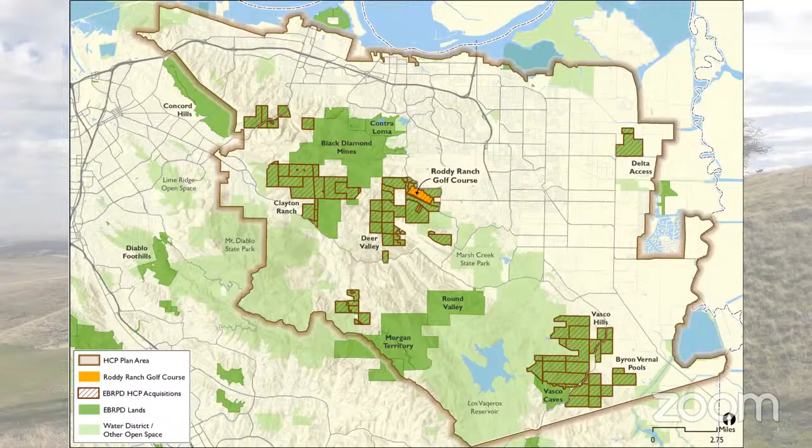A little bit about the Habitat Conservancy: it's a multi-agency partnership between Contra Costa County and cities of Eastern Contra Costa County. It may include up to 30,000 acres of protected lands in East County.

Recreation allowed on these lands is passive recreation only, so that could include things like hiking, mountain bikes, dogs on leash where allowed. We can have up to 4 staging areas, essentially areas where you can park more than 15 vehicles, and we're limited to recreational disturbances of a total of 50 acres, which includes trails, staging areas, and any sort of recreational improvements. The primary goal of the habitat conservation lands, as its name suggests, is habitat protection and restoration.

A little bit of site history: the land which we're calling the future Deer Valley Regional Preserve, of which Roddy Ranch Golf Course is a part, was purchased by Jack Roddy in the 1970s. He was a former rodeo star in the 50s and 60s, settled in the Antioch area, and grazed cattle on the land for many years. In the early 2000s, he saw an opportunity to build a golf course, and there was a golf club up in the hills near his home, which operated from 2000 to 2016.

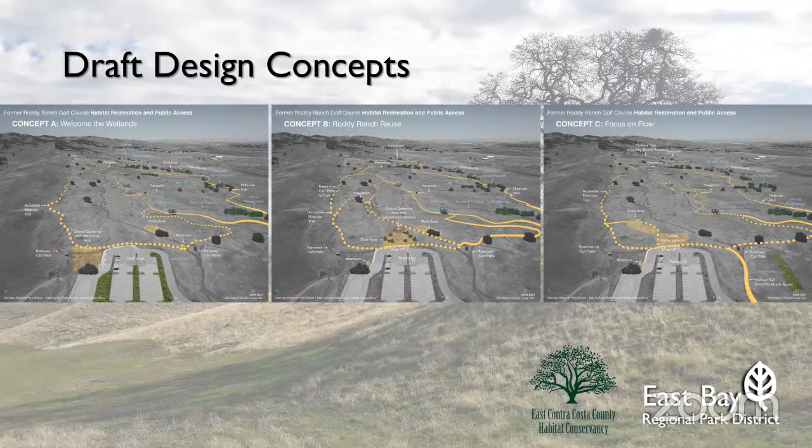I've got on the screen an aerial or perspective view of the 3 design concepts, with the yellow dashed and solid lines indicating accessible trails and multi-use trails, respectively. These were ideas that we presented to the public, and we got some feedback. They all contain certain restoration as well as public access features, such as overlooks, vernal pools, wildlife ponds, and multi-use trails.

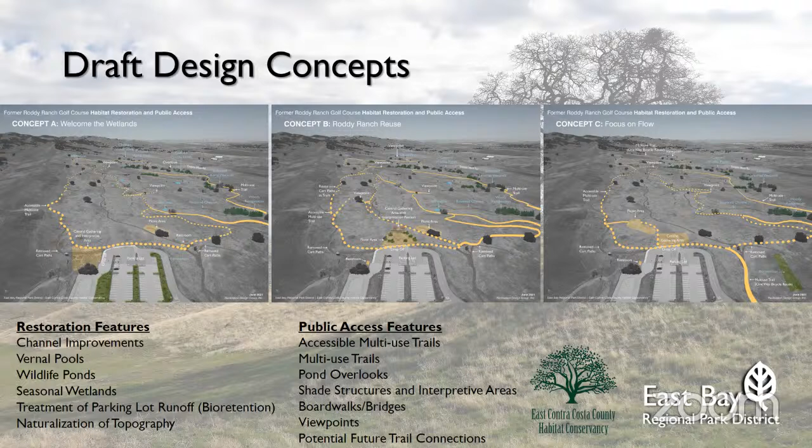This feedback was received not only from project staff, but from public officials, the general public, U.S. Fish and Wildlife, and CDFW, and was turned into a preferred concept, which I'll share with you momentarily. From that preferred concept, we essentially fleshed out the habitat restoration and public access plan. So the plan is essentially a narrative of the preferred concept map.

We've got a close-up perspective or bird's eye view looking northwest toward Black Diamond Mines in the distance. Again, the dashed lines are accessible multi-use trails, and the solid lines are natural surface multi-use trails.

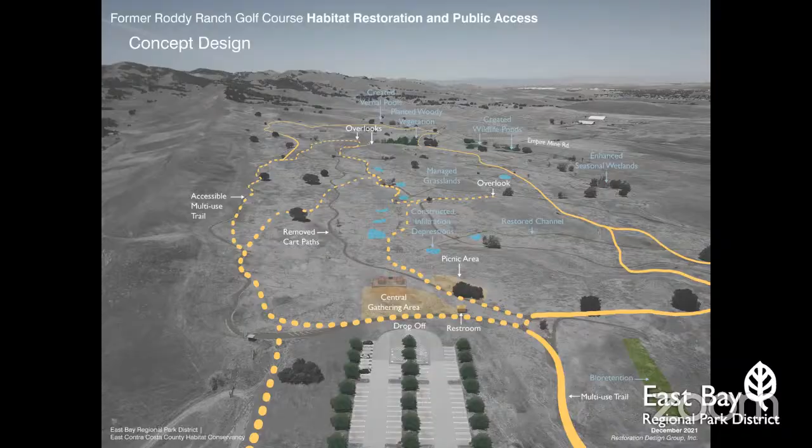The preferred design concept includes many areas of grassland and wetland restoration. If you can see on the screen, those pinkish gray areas with dashed lines around them show areas of potential restoration impact. The goal is to recontour the surface, which had been heavily modified when it was a golf course, into a more flowy surface so that rainwater, as it penetrates in the winter, can flow northward, downhill, toward those wetland features at the top. Each wetland has dashed lines around it, which is a 300-foot buffer.

The yellow lines are the multi-use trails, which are primarily 8 feet wide for the most part, except at the... I don't know if you can see my pointer here.

This trail right along here and looping around below the parking lot may be narrower than 8 feet, but the rest of the trails, both the multi-use trail to the west and the accessible loop system in the center, will be about 8 feet wide, which is the current width of existing golf cart paths.

So we've got about 4 miles of trails, including 1.6 miles of accessible loops. At the bottom right, we also heard from some of our equestrian users. We have a dedicated equestrian as well as bus parking for school groups, separated from the regular parking lot. Picnic area and interpretive pavilion are included around the staging area.

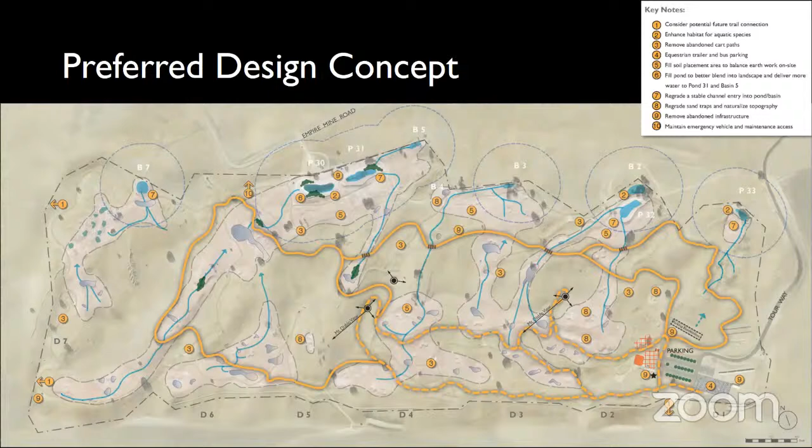So as those designs are refined, coming back and looking at whether something's appropriate as designating specifically for hiking or for some other use. One thing I do want to say, though, I know a lot of the concern around trail width and trail use often relates to the concerns around trail conflict.

And while I don't want to suggest that trail conflict would not happen at this site, it is a different park than, say, Briones or Pleasanton Ridge or some of our other parks. One, because of the open grassland nature, but two, just because of the topography of the site, it's not going to be a super attractive mountain bike destination.

So when we're talking about bike use here, I think what you're going to see much more commonly is little kids on little Strider bikes than middle-aged guys trying to tear around on trails. I think that's just the nature of this site and the rolling hills versus what you would see in some other locations.

So all that's to say, if a designated hiking only trail is something that would be appropriate here, I think that would be something that, as we refine the design, would be something to consider as how we sign things and how we operate it.

Okay, but you're essentially saying we've already done the environmental work and the negotiations, so there's not going to be any additional trails to these.

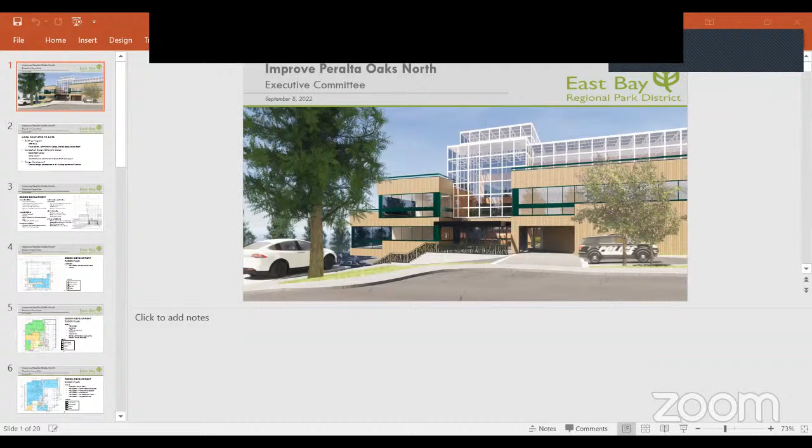What I will share with you now is a little bit more detail of what Lisa went into in her introduction. We'll talk about the work we've completed to date, then go into the floor plans developed as part of design development. After that, I'll share the budget, how it's all playing out, then go into schedule, and show conceptual renderings of what the interior space may look like.

Here's an exterior rendering of the building at 2955 Peralta Oaks Court, which is across the street, which we call IPON.

Here's a slide that talks about work completed to date. As Lisa said, first we have a building program. This is what's happened in the two years since we've hired Shaw Kawasaki Associates as our architectural consultant. We picked them because they worked on the coroner's office right across the street as well, so they have knowledge to that end.

In a building program, what happens is we buy a building, we know there's a square footage, and we need to clarify what can fit into that and figure out what space is required for the different uses. In other words, how big the boardroom is, or how big restrooms need to be for the occupancy. At the first stage, we look at what could fit into that building based on square footage.

That building program provided us with public safety and their administrative space, space for park staff, shared space between the two, and the boardroom. Also during that time, it was determined the district would seek to have this building certified as LEED Gold. That wasn't determined until we got into it and had purchased the building. So that was part of the building program.

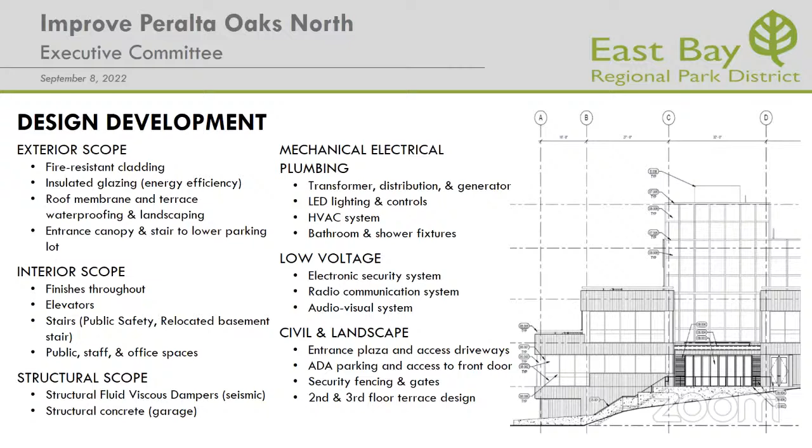So these are all of the things we've approached. Our architectural consultant has sub-consultants to help develop all these through the construction document phase. All the bullet points you see are the overarching ideas, and as we progress in the development of these plans and move into construction documents, we'll have specifics on all of these.

So with that, I will begin to show the floor plans that have been developed through design development, and where we are now. It was a great point to bring to the board so we can share with you how far we've come along.

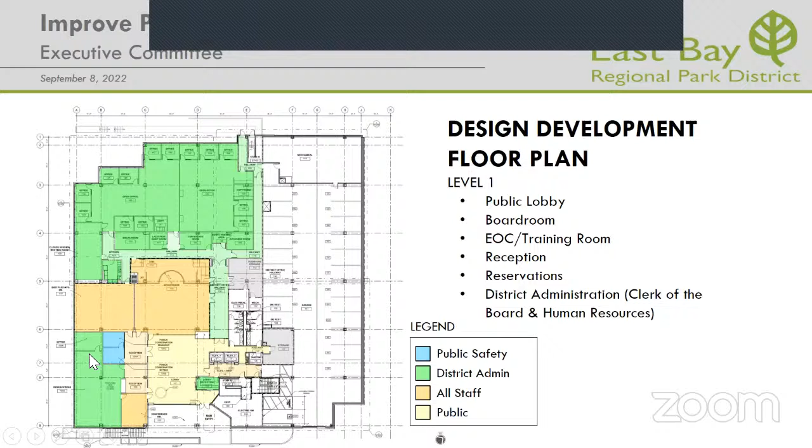Other features on the first floor: this space here is for reservations. As it is now, we have reservations upstairs, but as a public facing building, this would give them much more space to utilize, and it functions in a similar fashion to how it functions now.

This yellow area at the bottom in the middle would be the foyer. This circle highlights where the ficus tree is planted. There was much discussion about accessibility and how the foyer would operate, with concern about the public just being able to come in and out, and making sure we check that people are going to the appropriate places. So this little green rectangle has been added here, which would be a reception area.

The whole foyer is sort of an open, unconditioned space, which means there's no HVAC in there because it's a big atrium area. But this reception area would actually be an enclosed space, for COVID and many of the reasons we have now, for safety. It would be a small office, but it would be the entry where any public that would come in would be able to enter, meet a receptionist, and then be directed to where they needed to be.

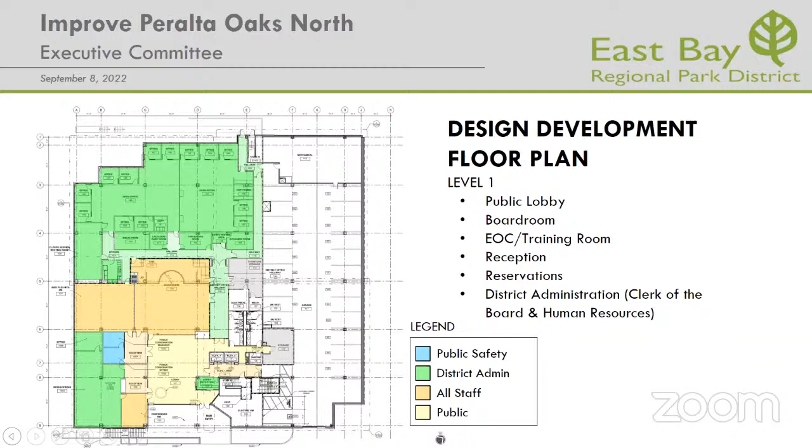So, apologize for that. The only public space would be the boardroom and that entry foyer area. And if anyone needed to seek public safety, there's a way to have that. The one blue space in this is the public services coordinator for public safety, so that would provide them an office and a space on the first floor.

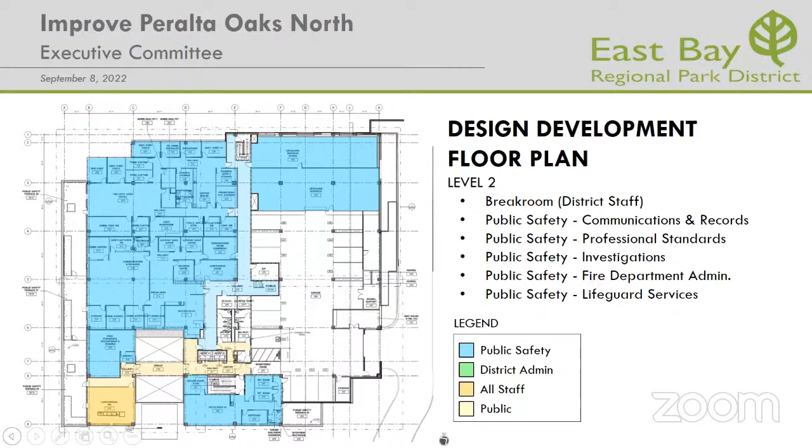The next two floor plans are predominantly public safety areas, as you can see by the predominant blue here. To the right lists all of the different aspects of public safety which would be on this floor. I won't go into detail of all of those specifics. One thing to note is on this floor there is an all-staff dining room in the lower left corner, kind of a kitchen area, and this has access out to this terrace, which overlooks and looks out to the east.

As part of developing this, we worked with public safety, and as you can see, there's only one door in and out to that terrace. So for fire reasons and others, there could be conditions that would limit the full use of that terrace. We heard that if we're going to have a public or all-staff kitchen dining area, they should have access to the full terrace. So we've accommodated that with the help of public safety, figuring out ingress and egress to that terrace for safety reasons.

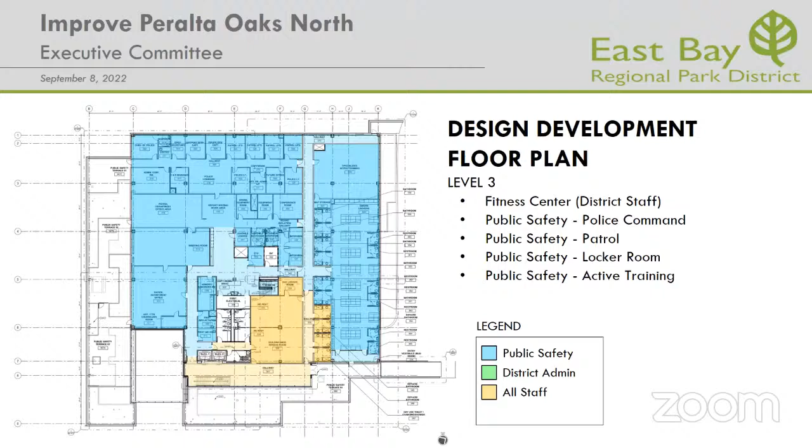Some of the major costs of the renovation are due to, as Lisa stated, the structural and seismic dampers and the retrofit. Because of its proximity to the Hayward Fault, and because of current building code, it has to be reinforced to 1.5 seismic as opposed to the typical 1. This is regardless of whether it's a public safety building or operates as an EOC, just because of its proximity to the fault and building code requirements that we have to make those seismic reinforcements. In addition, the building has sat vacant for many years.

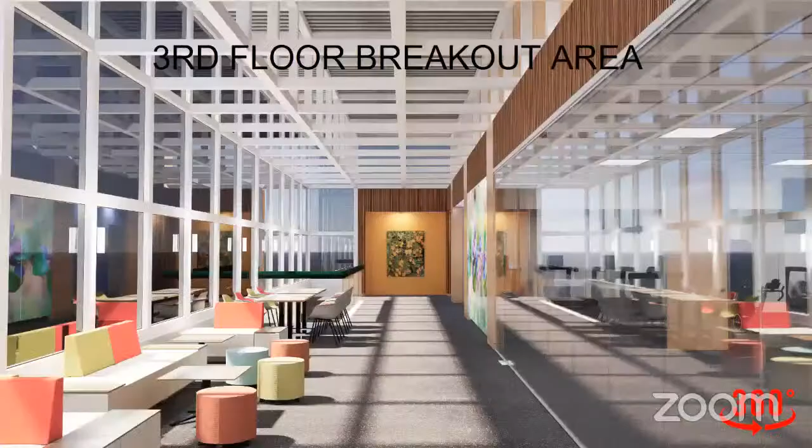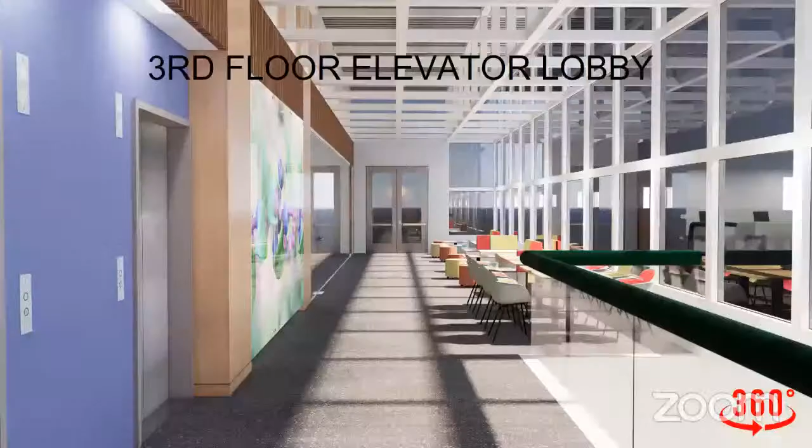Here's where the third floor breakout area is. This is the breakout area in front of where the fitness area would be, so this would be a common space for public safety and all park staff. And then here's the elevator lobby on the third floor.

That concludes my presentation. Thank you for letting us update you. Happy to field questions as I'm able.

I think as you anticipated, this felt like a gut punch when I saw these numbers. And I just want to start off by asking if $589 a square foot is, you said, standard Bay Area for commercial renovations. What is new commercial construction?

New construction is approximately approaching $1,000 a square foot right now. Okay, that makes me feel a little better, because when I first saw this number, I said we made a mistake, we should go get some raw land and build new. We did not anticipate this kind of cost when we bought that building. Understood.